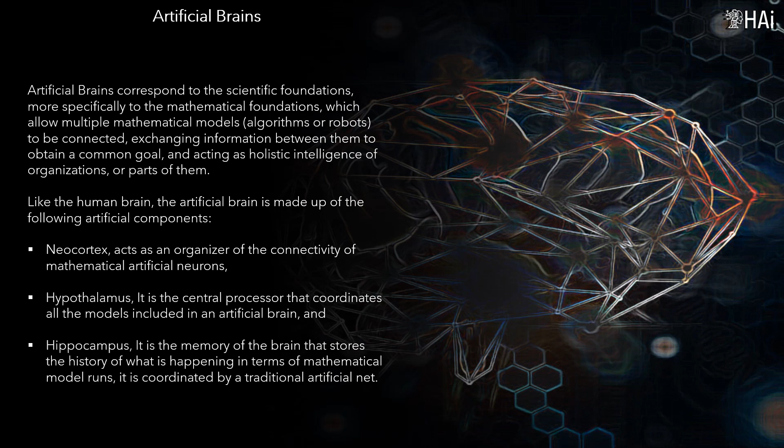Industrial enterprise-wide optimization. Industrial value chains can be conceived as multiple links that work as the union of two chains: supply and demand. The supply chain is associated with production activities, while the demand is associated with the business. These chains cannot be thought of as mutually exclusive, as the border that could divide them is fuzzy. What is clear is that they are complementary and that their union affects all the value chain.

HAi models mainly support two types of industrial planning activities. S&OP, sales and operations planning activities that are carried out periodically, usually every month or every week, to coordinate selling products with production activities.

IBP, integrated business planning, activities that are carried out periodically, usually every 6 months or every year, and aim to perform integrated value chain of the organization planning.

The solutions offered by HAi to the general industrial sector are based on the integration of the following groups of solutions: HAi DCO, Demand Chain Optimization; HAi SCO, Industrial Supply Chain Optimization; HAi Bio, Bio-Industrial Supply Chain Optimization; and HAi HRA, Human Resources Analytics.

In 2006, Jeremy Shapiro published the article 'Beyond Supply Chain Optimization to Enterprise Optimization,' in which he stated: 'The recognition that strategic supply chain planning should be integrated into larger business planning exercises will serve to break down barriers to fact-based decision-making,' starting from SCM, or supply chain management, focused on production, as a first step in standardized planning.

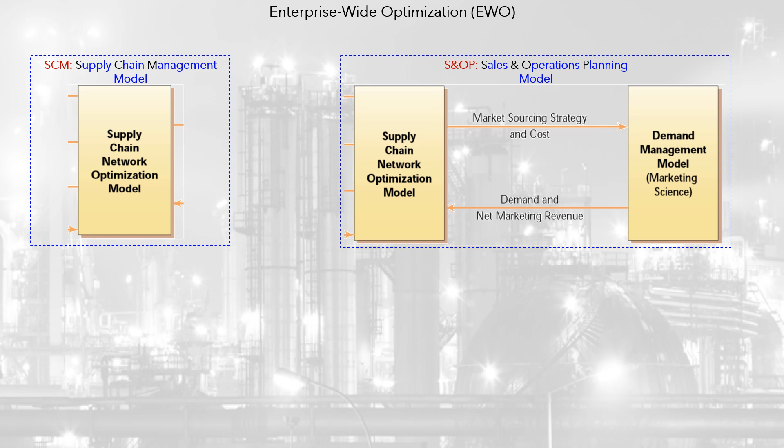Shapiro envisions what the S&OP, Sales and Operations Planning model, formally is, as the integration of sales and production planning. And finally, it establishes what is now IBP, Integrated Business Planning Model, which involves the financial planning as part of planning. The actual experience has not been as Shapiro envisioned it, but every time we are closer to it, with the incorporation of ALM models, assets and liabilities management, as part of supply chain planning.

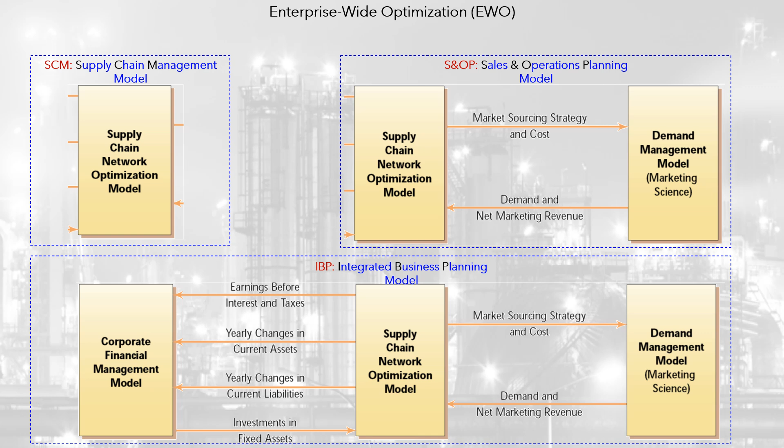In the paper, Enterprise Profit Optimization, EPO, The Next Wave in Value Creation, Robert Phillips from Manugistics said, "Integrating pricing actions and supply chain actions, EPO provides companies with the tools required to quickly and effectively achieve real optimization goals."

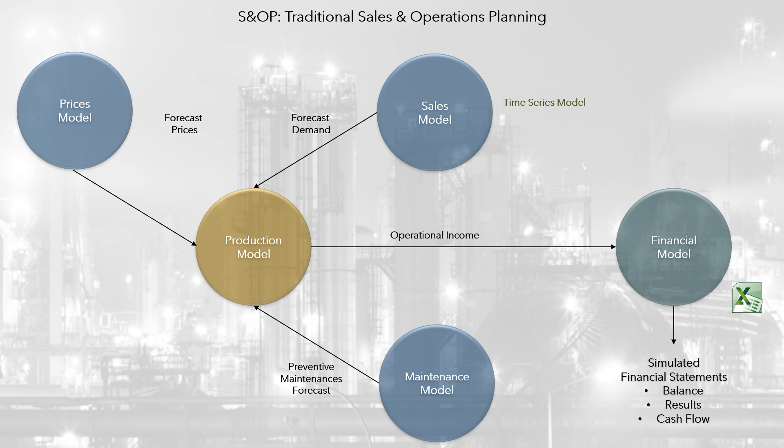Until the advent of Industry 4.0, S&OP modeling was concentrated on production modeling, considering as exogenous parameters the results of models for sales and maintenance. The financial results are obtained from post-processing, in some cases in Excel books.

In the era of Industry 4.0, S&OP may be constructed based on 8 groups of solutions or systems: production, energy, maintenance, distribution, sourcing, human resources, financial, and sales and marketing. HAi views the systems as groups of equations; which must be included in the S&OP mathematical problem depends on many factors, so there is no revealed truth regarding what the S&OP problem is. Since the equations are defined in a database, the configuration of a problem is limited to selecting from the equation store the ones that the modeler wants to consider in the model.

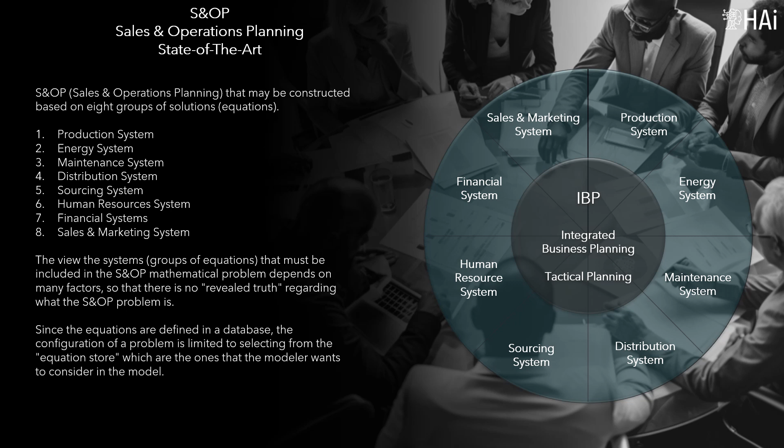Visually, it is easy to see the evolution of the traditional S&OP concept to a modern IBP that covers virtually all the operational functions of an industrial organization. This leads to 2 problems that must be solved from a computational point of view. If traditional approaches are used, a large number of programmers are required to generate all the necessary source code and to coordinate all the models, and large computational power is necessary to solve the integrated problem.

This evolution gives rise to enterprise-wide optimization. Enterprise-wide optimization, the comprehensive and complete view of the value chain, improves competitive advantage, reduces costs and increases profits. Therefore, managers seek to comprehensively optimize the planning and scheduling activities of their value chain, which was originally understood as the coordinated sum of supply chain management, SCM, and demand chain management. Today, EWO has expanded and covers all functional areas of the organization, including financial and human resources chains.

There are 4 dimensions to the optimal synchronization of a supply chain, namely: functional, associated with the purchase, manufacture, transport and storage of industrial inputs and products; spatial, associated with activities through industrial facilities and different forms of markets; hierarchical, associated with the impact of decisions, strategic, tactical and operational; and business. Enterprise integration makes SCM one of the components of a broader view of integrated planning. They respond to the purposes of strategic and tactical planning within the organization.

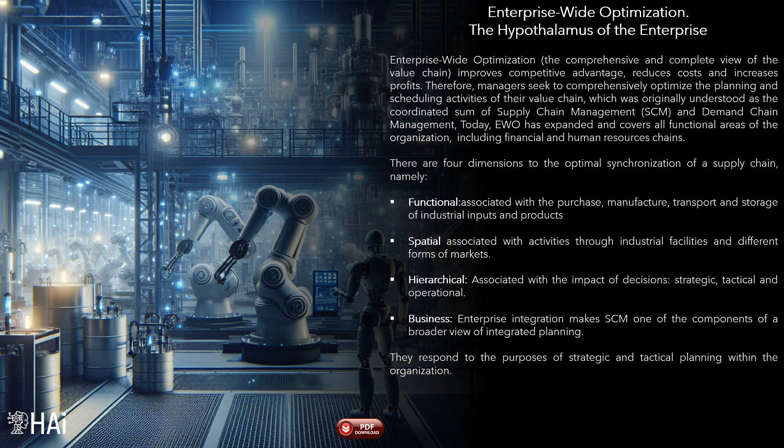Hierarchical coordination of planning tools. It is traditional to organize decisions hierarchically into strategic, tactical and operational. The operational decisions are divided into scheduling and advanced optimal control. However, due to the technological progress generated by Industry 4.0, mainly in relation to smart metering systems, nowadays we can talk about a new type of online optimization modeling: real-time distributed optimization. From the point of view of mathematical modeling, hierarchical levels are intertwined and coordinated through the boundary conditions in time, and common modeling that can be shared.

The modeling strategy of HAi is that all models of a decision support system can communicate with each other. Under the principle of transitivity of algebraic formulations, models grow in complexity as they descend the hierarchy of decisions. All models share equations, mainly those related to the physical process. Therefore, they can be made in a continuous modeling process.

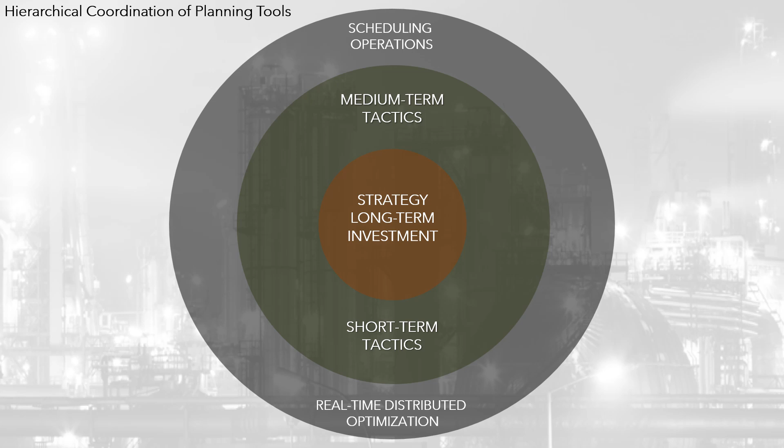The models of higher hierarchy will be more aggregated, in order to cover long periods of analysis, of the order of years. The emphasis of the model should include the interpretation of the economic and technological future, so it is appropriate that they are stochastic optimized. As the models approach real time, the level of detail increases and the planning period decreases, the most important being the engineering representation of the process.

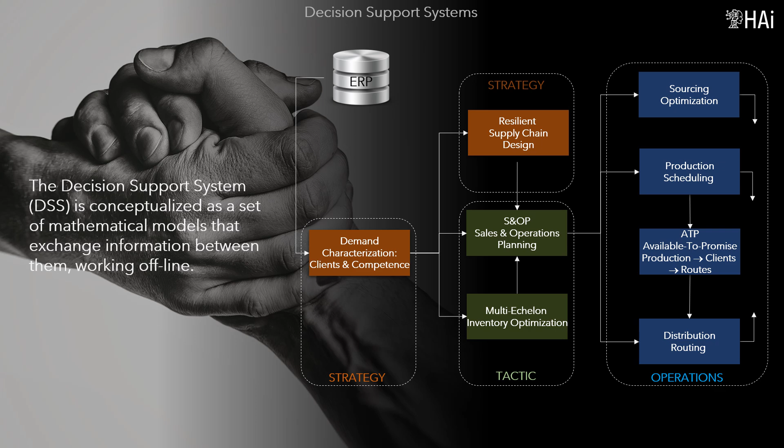Spatial coordination is related to activities through industrial facilities in various regions and different forms of markets. The decision support systems, DSS, were conceptualized as a set of mathematical models that exchange information between them, working offline. The artificial brain is the evolution of DSS under the Industry 4.0 revolution, conceptualized as a set of mathematical models that autonomously exchange information between them, working online, using distributed optimization.

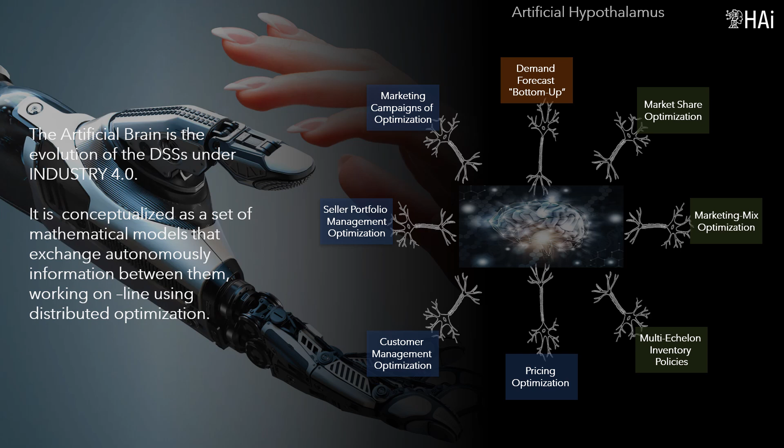HAi OIL EWO meets all the software solutions developed by HAi, in different areas of application of mathematical optimization models, oriented to planning and to scheduling operations, in different businesses of the petroleum products supply chain. To ensure optimal decision-making at the level of strategy and tactics, the system must be considered, synchronizing the different links in the chain, in space, function, and time.

The management of the complete oil supply chain must be based on the integrated optimization of the different links. It is one of the main research topics worldwide, due to the importance and impact of the products it handles. The support of this type of planning is complex, and therefore turns out to be a perfect field for the application of optimization tools, mathematical programming, in order to support decisions that allow the optimal coordination of the holistic supply chain.

Oil enterprise-wide optimization integrates mathematical models for each of the links in the oil supply chain, in such a way to manage the planning of the supply chain with a holistic vision. The design of HAi OIL EWO was the result of work done for a multi-business oil company. The union of models, and their coordination, forms the hypothalamus of an oil enterprise.

The current computational power allows to model in detail the supply chain, considering individually all the systems that compose it. This allows to visualize all the existing bottlenecks that affect the maximization of economic gains. When all the models that make up a company are solved using the concepts of real-time distributed optimization, an artificial hypothalamus is obtained. Structured mathematical modeling allows all models to merge around a core of equations that connect them all.

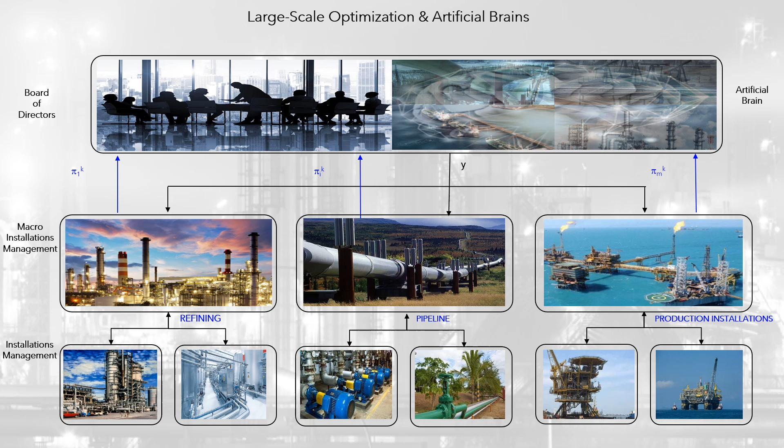Large-scale optimization and artificial brains. One of the fundamental ideas of the artificial brain is the atomization of the system, bottom-up approach, to integrate multiple mathematical models, using the framework of large-scale optimization methodologies, like multi-level Benders theory, and Lagrangian relaxation.

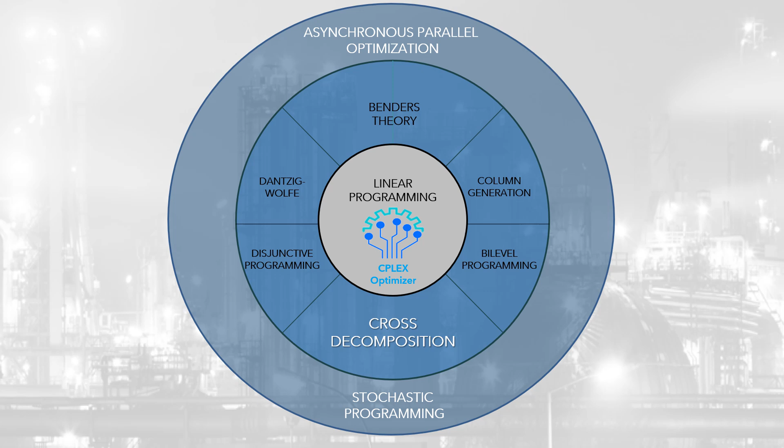Given the complexity of the real world, which involves mathematical models of all types, linear, nonlinear, discrete, continuous, convex, non-convex, etc., it cannot be thought that with a single methodology, all the problems that make up an artificial brain can be solved. Therefore, it is required to have access to multiple large-scale optimization methodologies, which, using the principles of cross-decomposition, connect all mathematical problems, to perform autonomous distributed optimization in real time. Large-scale optimization technologies rely on linear programming as the basic algorithm.

Oil and gas optimization solutions. Below are several optimization solutions, commonly applied in the oil industry. The oil industry includes global processes of exploration, extraction, refining, transportation and marketing of petroleum products. The largest volume products in the industry are fuels, natural gas, fuel oil, and gasoline. However, petroleum is the raw material for many chemicals, including pharmaceuticals, solvents, fertilizers, pesticides, and plastics.

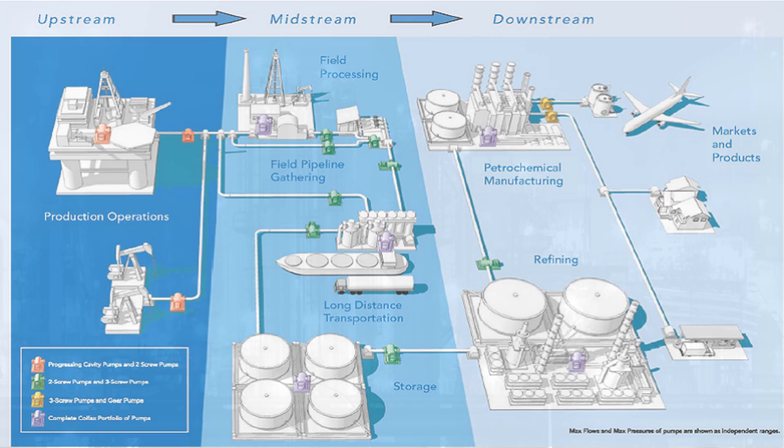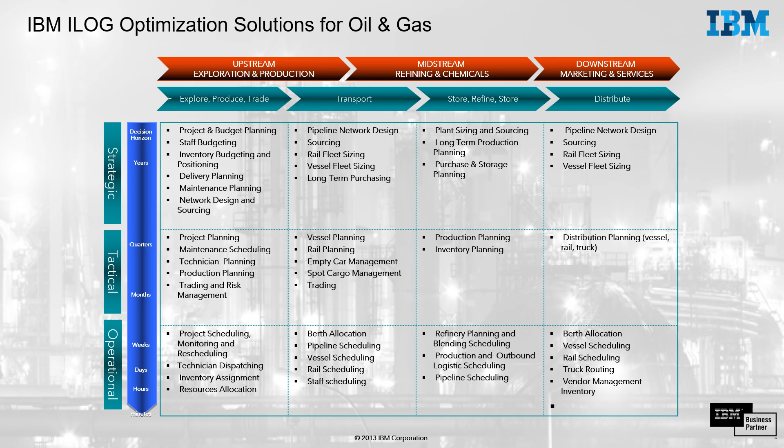Under the modern vision of enterprise-wide optimization, production planning models, of any hierarchy, must integrate multiple functions, or models, and not be limited to sales and production planning. In the case of planning a large refinery, the following group of models, or functions, should be considered. Oil refining. Energy and industrial services. Oil assets maintenance. Sales and distribution. Crude oil sourcing. Human resources, and financial.

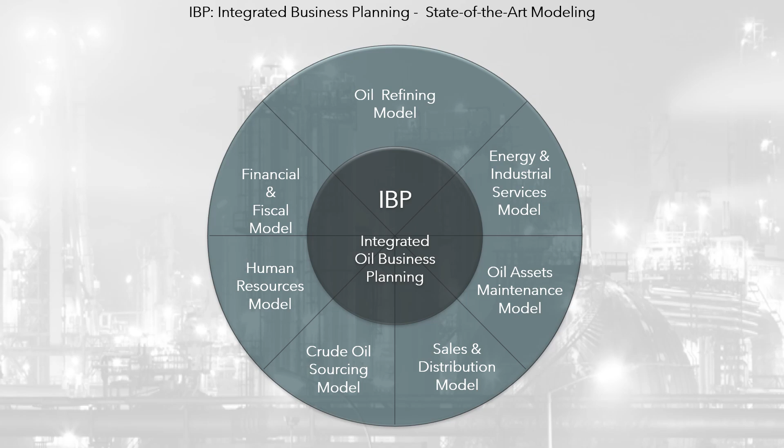Oil enterprise-wide optimization integrates mathematical models for each of the links in the oil supply chain, in such a way to manage the planning of the supply chain with a holistic vision. The design of HAi OIL EWO was the result of work done for a multi-business oil company. The union of models, and their coordination, forms the hypothalamus of an oil enterprise.

The current computational power allows to model in detail the supply chain, considering individually all the systems that compose it. This allows to visualize all the existing bottlenecks that affect the maximization of economic gains. When all the models that make up a company are solved using the concepts of real-time distributed optimization, an artificial hypothalamus is obtained. Oil refining optimization.

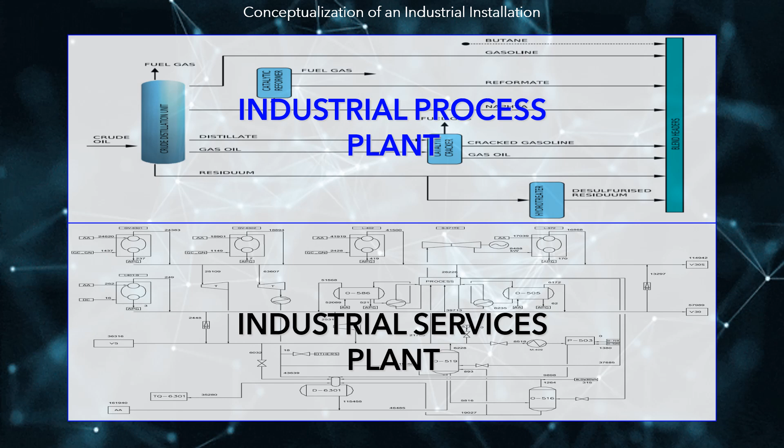Hypothalamus AI considers the production process as a union of two processes. Product transformation, conversion of crude oil into commercial products, through processing units, and energy transformation, processing of auxiliary industrial services required by process units, and which are consumers, or energy producers, in the service units.

To optimize energy efficiency, the first step is to optimize the integrated supply chain, since this is the part of the production process that consumes more economic resources.

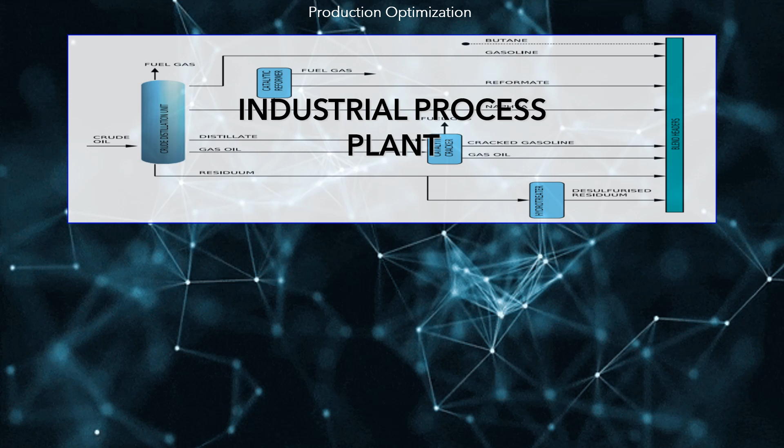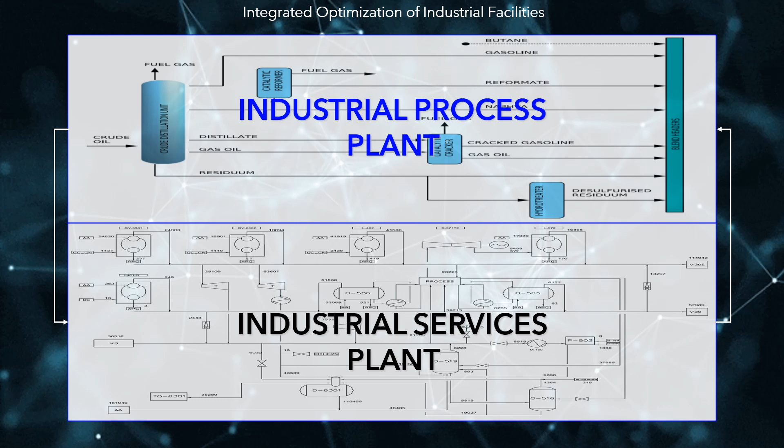Hypothalamus AI considers the production process as a union of two processes. Product transformation, conversion of crude oil into commercial products, through processing units, and energy transformation, processing of auxiliary industrial services required by process units, and which are consumers, or energy producers, in the service units.

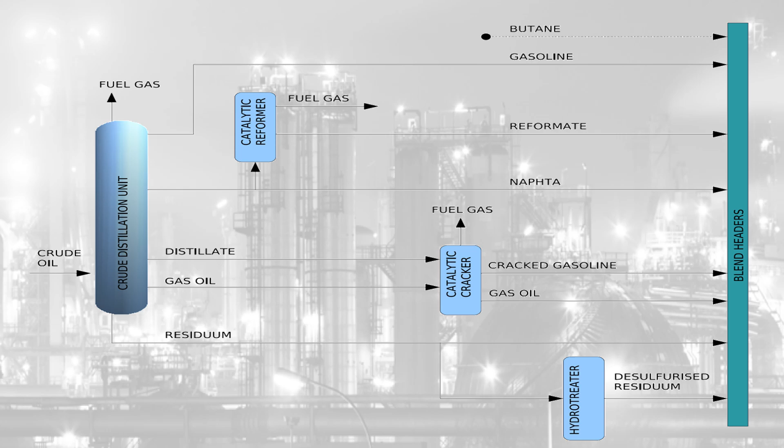The image presents an example of a refinery, which is composed of 5 facilities, or process units. A simplified flowsheet of a crude oil refinery is shown in the graph. The process is divided into 3 stages: crude oil management, crude to fuel transformation, and blending operations.

The video oil refining optimization, advanced analytics solutions presents HAI's vision of this problem, and should be considered as a reference for our proposal. Linear optimization model for sales and operations planning, S&OP.

HAI-OIL-REF includes a generic model that can serve interchangeably to plan, at the aggregate level, the 2 crude and/or biomass refining processes. The level of aggregation is fundamentally related to the non-linearities associated with this type of process, but not with the level of detail with which it is possible to represent the production processes, which can be spatially detailed in all units used in the production of refined products.

HAI-OIL-REF considers the refining process as a union of 2 processes. Product transformation, conversion of crude oil and biomass into refined products, through process units, and energy transformation, processing of auxiliary industrial services required by process units, and which are consumers and/or energy producers, in so-called service units.

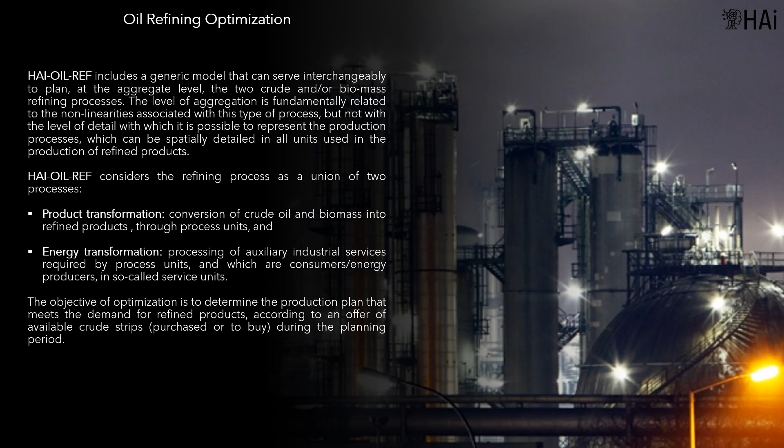The objective of optimization is to determine the production plan that meets the demand for refined products, according to an offer of available crude strips, purchased or to buy, during the planning period. From the point of view of mathematical modeling, HAI-OIL-REF considers two types of process units.

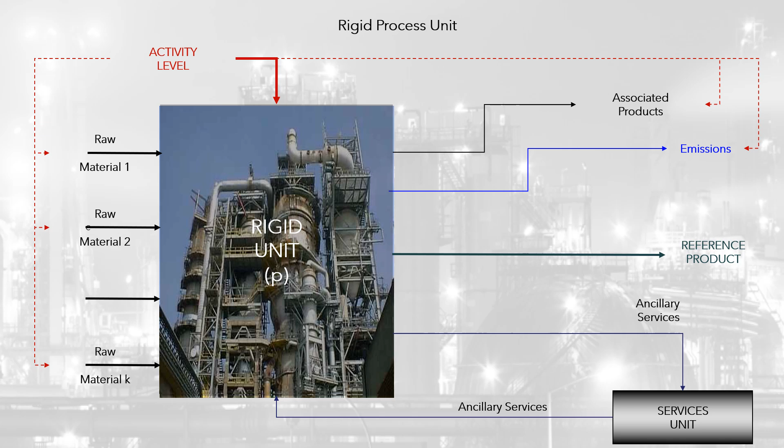Rigid unit considers a unit as a process that is defined based on certain input, raw material, refined final or intermediate products, and that produces refined products in fixed proportions, and flexible unit considers multiple possibilities for production processes in which the proportions of the blending of the products consumed, and the quantities produced, are determined by the model.

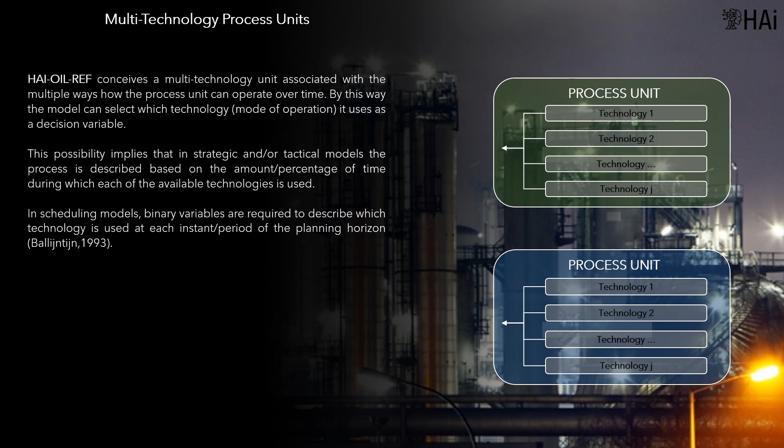For flexible units, quality specifications must be introduced as part of the model constraints, so that the volume and/or weight product generated by the model meets these specifications. HAI-OIL-REF includes a multi-technology unit, associated with the multiple ways how the process unit can operate over time. By this way, the model can select which technology, mode of operation, it uses as a decision variable.

This possibility implies that in strategic and/or tactical models the process is described based on the amount, or percentage, of time during which each of the available technologies is used. In scheduling models, binary variables are required to describe which technology is used at each instant, or period of the planning horizon.

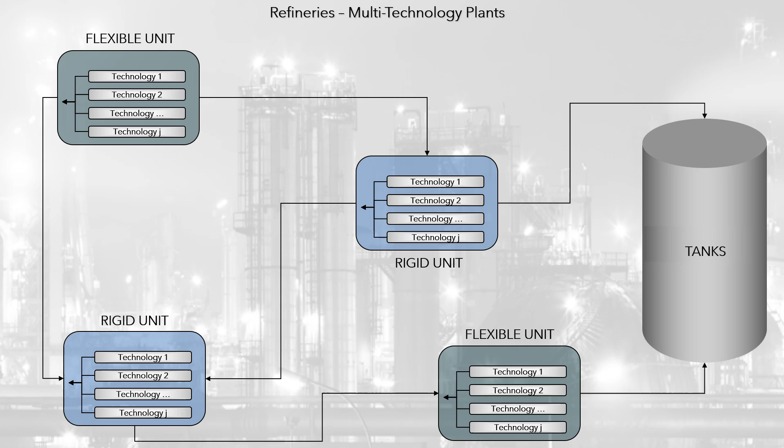The modeling of the connectivity between production units can be done in an aggregated way, through tanks, or in detail through collectors. This representation is appropriate when it wants to visualize bottlenecks in the flow of products, and when it wants to link the auxiliary service plant with the process plant.

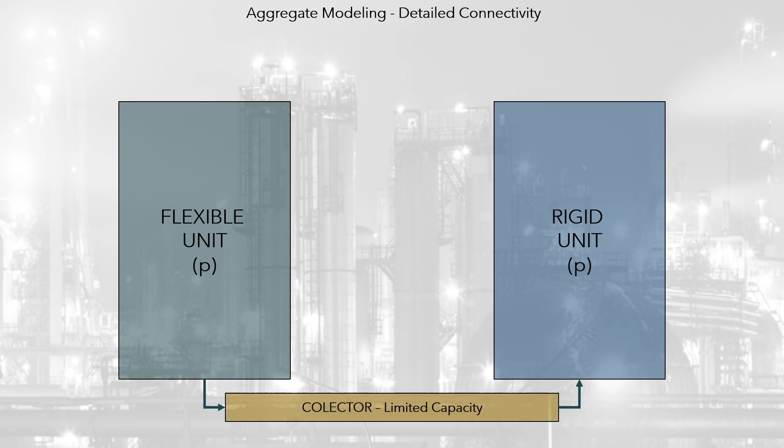Modeling a refinery based on a single type of unit has its drawbacks. A fixed refinery always produces excessive amounts of some finished products, a flexible one generally has too much flexibility compared to a real refinery. That is why the best strategy to model refineries is based on a combination between rigid and flexible units considering costs, demand, capacity, production, profit, and possible expansion of the refinery.

However, the units, rigid or flexible, can operate continuously, or in batches. In addition, the flexibility of the unit extends, not only to the different refined products but also to the different raw materials, to the sources of the raw materials or even to any possible combination of them.

In this way, the refinery processes can be optimized through a model with a unified mathematical representation, where all types of units, processes, and forms of operation are incorporated. As a byproduct of processes are considered the pollutants of the environment, on which restrictions may be imposed.

Multi-period refinery planning mixed nonlinear model. This section is supported in the paper. Refinery production planning, multi-period MINLP with nonlinear CDU model.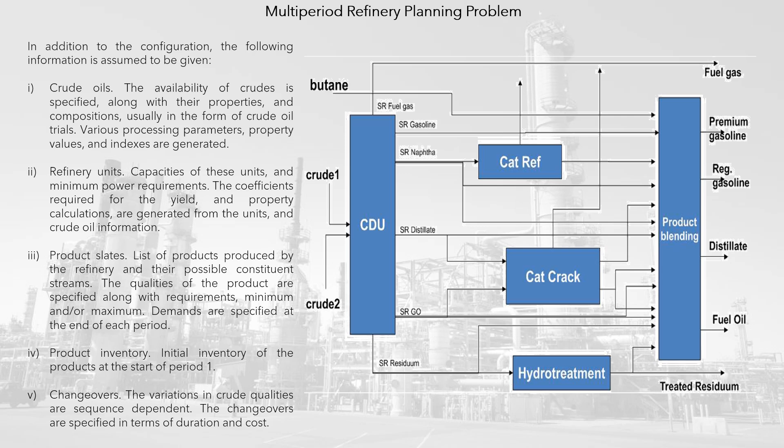Product inventory. Initial inventory of the products at the start of period 1. Changeovers. The variations in crude qualities are sequence dependent. The changeovers are specified in terms of duration and cost.

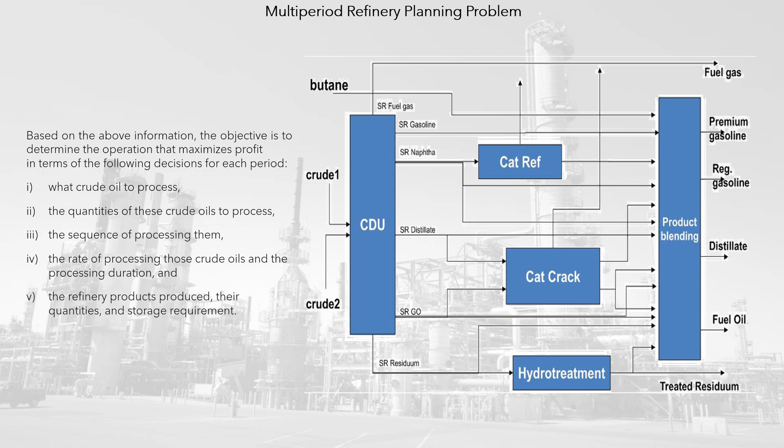Based on the above information, the objective is to determine the operation that maximizes profit in terms of the following decisions for each period: what crude oil to process, the quantities of these crude oils to process, the sequence of processing them, the rate of processing those crude oils and the processing duration, and the refinery products produced, their quantities, and storage requirement. The mathematical formulation for the multi-period refinery planning model builds on the previous work of Alattas, Grossmann, and Palou-Rivera, 2011, and Erdirik-Dogan and Grossmann, 2008.

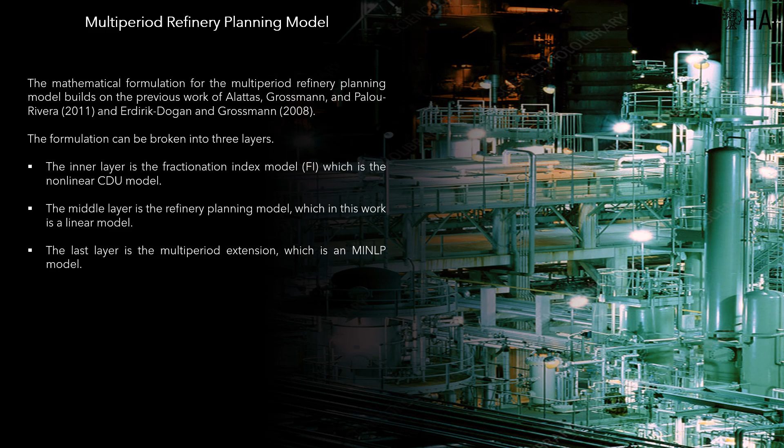The formulation can be broken into 3 layers. The inner layer is the fractionation index model, FI, which is the nonlinear CDU model. The middle layer is the refinery planning model, which in this work is a linear model. The last layer is the multi-period extension, which is a MINLP model.

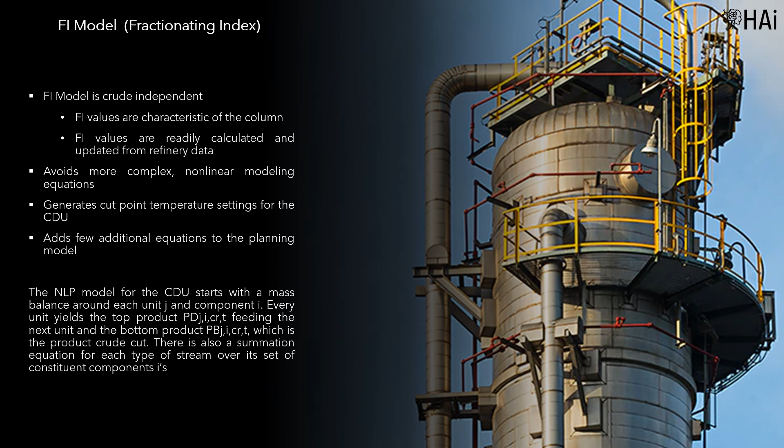The appeal of the FI model is that it is crude independent. FI values are characteristics of CDUs; they are readily calculated and updated based on refinery data. It is based on a simple nonlinear modeling approach, avoiding more complex ones, calculates cut point temperatures that help in other calculations and models, and has relatively few equations to add to the planning model.

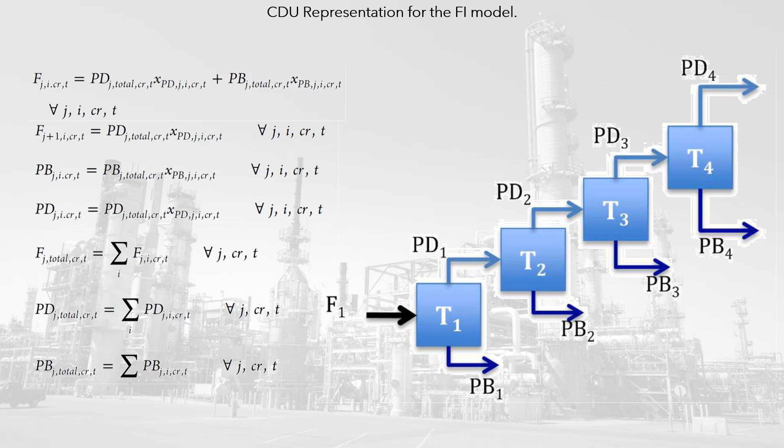The NLP model for the CDU starts with a mass balance around each unit J and component I. Every unit yields the top product PD feeding the next unit, and the bottom product PB, which is the product crude cut. There is also a summation equation for each type of stream, over its set of constituent I components. Ti is the output boiling point temperature of component I. The image presents the equations that must be met.

The splits of the distributed components are calculated using the FI parameters. For each unit, there are 2 FI values, one for the rectifying section and another for the stripping section. Choice of the correct value is based on the calculated temperature and the component. The rectifying FI, FIr, is used if the temperature is greater than the component boiling temperature, otherwise, the stripping FI,

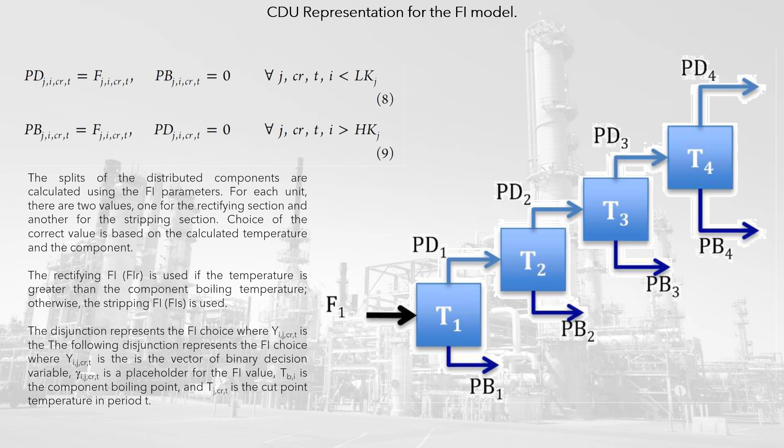FIs, is used. The disjunction represents the FI choice where y is the vector of binary decision variables, gamma is a placeholder for the FI value, TB_I is the component boiling point, and T_J,CR,T is the cut point temperature in period T. The component distribution at each unit J is based on the light key LK_J and heavy key HK_J components for each unit based on the initial and end boiling points relative to each cut. The components lighter than the light key are only obtained in the top product stream, while the ones heavier than the heavy key are only obtained in the bottom product stream.

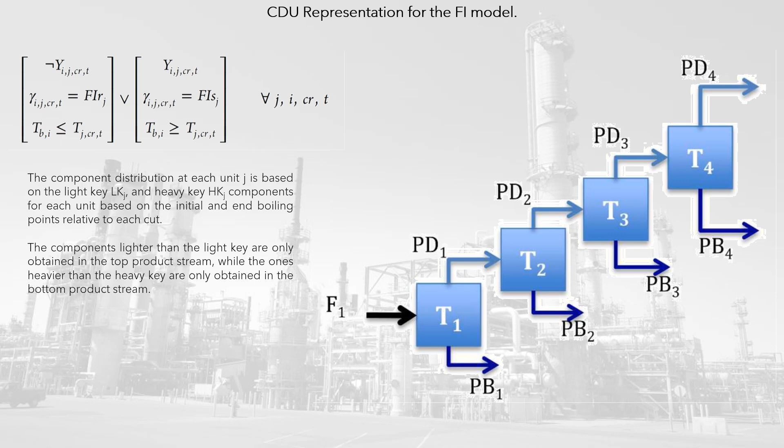The next model is the refinery planning model. This includes the set of equations for calculating the product yields from each process unit, except the CDU, as well as stream properties calculations and product blending. Typically, the planning model will include checking the feedstock availability, meeting the product demands and the objective function. However, these constraints and equations are moved to the next layer of the model as part of the extension from single period to multi-period horizon.

The throughput of process unit K is calculated using a coefficient multiplied by the feed unit, to obtain the output unit product flow. The capacity requirement of unit K is ensured by using the appropriate constraints. The interconnections between the process units are managed using several splitters and mixers. The crude processing rate is linked to the CDU model.

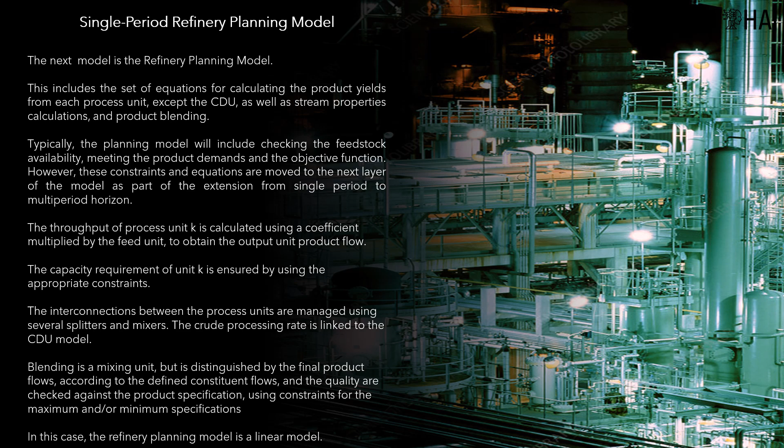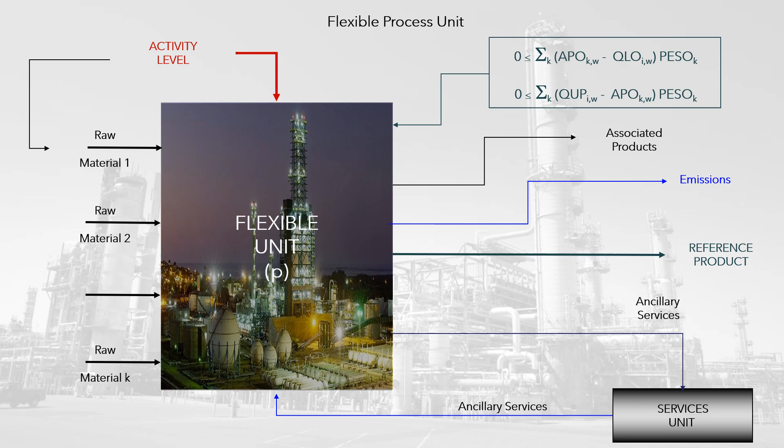Blending is a mixing unit, but is distinguished by the final product flows, according to the defined constituent flows, and the quality are checked against the product specification, using constraints for the maximum and/or minimum specifications. In this case, the refinery planning model is a linear model. The multi-period layer is based on the approach proposed by Erdirik-Dogan and Grossmann, 2008.

The idea is to determine the length of the processing times for each crude oil, and to use traveling salesman constraints, to determine the sequence for processing crude in each period, and identifying the link to break, and connect the sequence to the adjacent periods. The objective is maximizing profit.

When there are no sub-cycles in any period, the changeovers are properly accounted for in each period, and any possible crossovers. Otherwise, subtour elimination constraints are added until all sub-cycles are eliminated. Also, since the duration of the changeovers is relatively modest, the model assumes for simplicity that changeovers cannot cross periods. The extension to this case can be easily implemented.

The development of these planning models is broken into two categories. LP models, namely fixed yield and swing cuts, like PIMS, and NLP models, including the aggregate model and fractionation index model. In this case the model is MILP.

Case: Crude oil scheduling and refinery planning. This case is based on the document Crude oil scheduling and refinery planning by Lagrangian relaxation. Both crude oil scheduling and refinery planning are formulated as optimization problems, and are integrated into a single full-space MILP. The integrated formulation is constructed based on the overlap between the CDU charging operations at the scheduling level, and the CDU feeding decisions at the planning level.

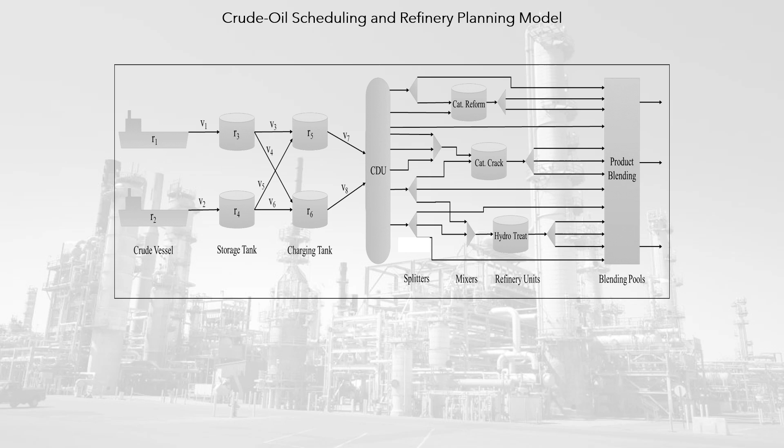The mathematical formulation for the full space problem is developed in three stages. Multi-period discrete time formulation for refinery planning, RP, maximizing the total NPV. Priority slot-based continuous time formulation for crude oil scheduling, CS, with multi-period extension, minimizing the total crude purchasing cost, and

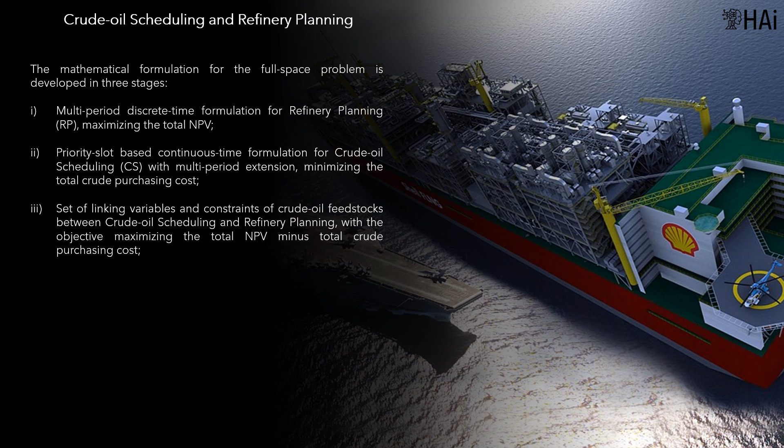set of linking variables and constraints of crude oil feedstocks between crude oil scheduling and refinery planning, with the objective maximizing the total NPV minus total crude purchasing cost. The video case, Crude Oil Scheduling and Refinery Planning, presents more details of this problem.

Industrial Services Optimization. ISO corresponds to one of the models oriented to the optimization of energy consumption in industrial plants that include large-scale industrial service plants, such as refineries, petrochemicals, etc. These services often include self-generation, cogeneration, and the exchange of energy with the interconnected electricity system. The objective of the model is to minimize the consumption, or cost, of the energy required by the industrial processes, supported by the industrial services plants.

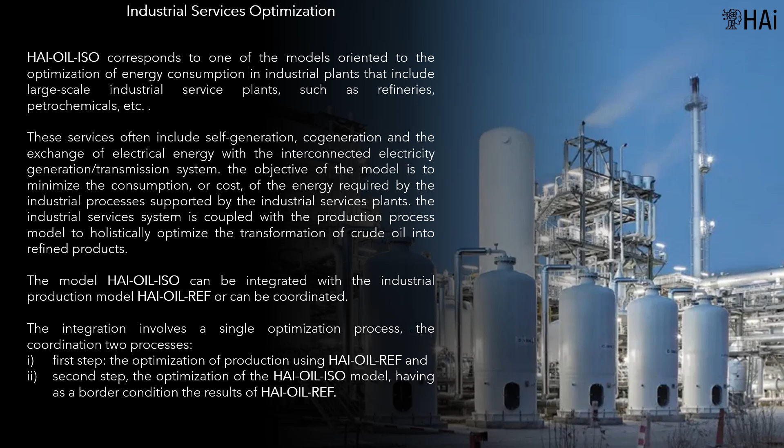The industrial services system is coupled with the production process model to holistically optimize the transformation of crude oil into refined products. This section focuses on industrial services plant optimization. Service plant: place where various industrial operations, related to the auxiliary services demanded by process plants, are developed.

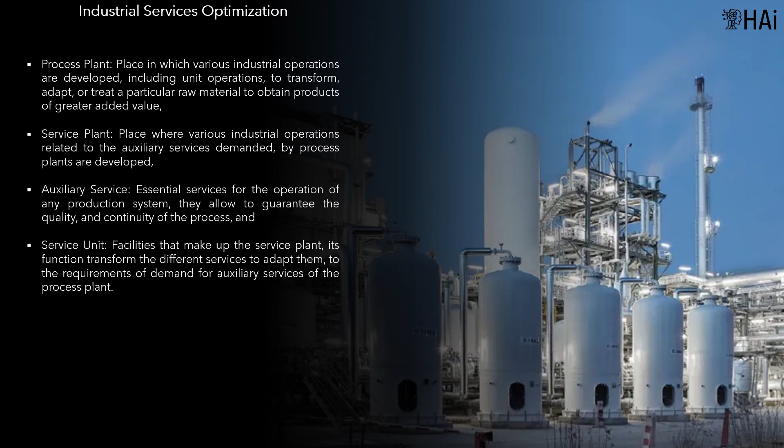Auxiliary service: essential services for the operation of any production system; they allow to guarantee the quality and the continuity of the process. And service unit: facilities that make up the service plant; its function is to transform the different services to adapt them to the requirements of demand for auxiliary services of the process plant.

Demand fluctuations are typical of utility or thermoelectric plants in petroleum refineries. Among the major causes are changes in the oil feed properties, multiple operational campaigns, maintenance of process units, interruption of electric energy supply, and cost variations of fuels and electric energy.

On the other hand, utility systems are essential for the operational feasibility of refineries. They must continually adapt their production levels to satisfy dynamic demand patterns. Therefore, the designs of utility plants tend to present a high level of flexibility, allowing multiple operational configurations that satisfy the same demand targets, sometimes with significantly different operating costs.

The processes that govern energy exchange and fluid dynamics are nonlinear. The optimal point of operation of the units of the service system varies depending on the flow, temperature, and pressure handled by the unit. Efficiency is a nonlinear indicator of great importance, relating the amount produced to the amount of raw material used. For the management of this indicator, it is necessary to have an adequate data acquisition system, which ensures correct measurement of the parameters that facilitate its use.

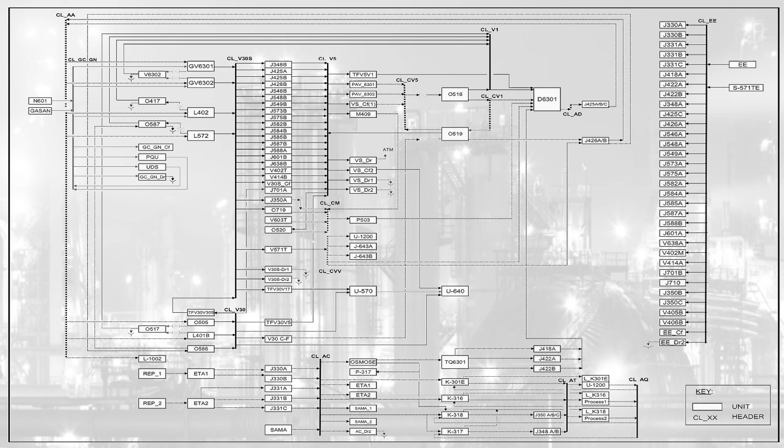In service plants, we find different types of units that interact and interconnect with other units to transform one service into another. Different types of service units are used to describe the process, and although the diversity of units and functionality is clear, within the modeling they will be considered as a single entity, characterized by the value of the parameters that define it. These parameters refer to input, product, and driver.

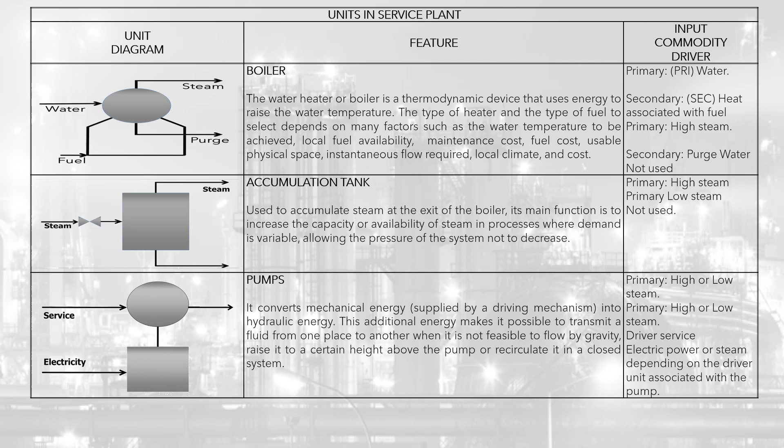The table presents the main units that make up the service plant and their basic functions. Units such as pumps, boilers, accumulation tanks and valves, condensers, manifolds, and steam turbines are specified.

There are other fundamental elements for the proper functioning of the service plant, such as measuring units to control the operating conditions of the units, like pressure gauges, thermometers, water level indicators, flow meters for steam, alarm and control devices, among others. These elements are not handled as entities within the mathematical model that represents the service plant, but they are of great importance, since they make up the data acquisition system, fundamental to the state estimation modeling process.

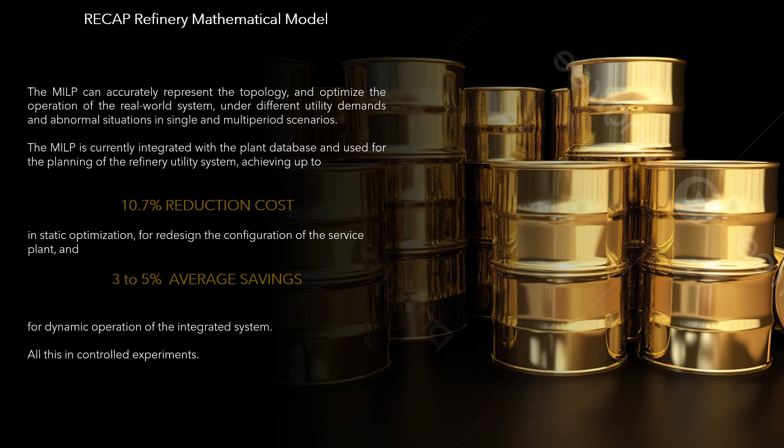The Petrobras mathematical model can accurately represent the topology and optimize the operation of the real-world system under different utility demands and abnormal situations in single and multi-period scenarios. The model is currently integrated with the Petrobras plant database and used for planning the recap refinery utility system, achieving up to 10.7% reduction in cost for static optimization to redesign the configuration of the service plant, and 3 to 5% average savings for dynamic operation of the integrated systems. All this in controlled experiments.

The central process of tactical optimization of production and energy management is related to the integration of the two systems through integrated mathematical modeling.

Artificial intelligence transforms business sustainability. The use of decision-making artificial intelligence, DMAI, is becoming more common to help companies achieve their carbon emission reduction goals and become more aware of the impact their business operations have on the environment. According to a study conducted jointly by Microsoft and PwC, the use of artificial intelligence can help companies provide valuable information and make more informed decisions, leading to better results in their sustainable practices and economic results. The research reveals that DMAI can improve energy efficiency by analyzing data from sensors and other sources to identify areas where energy consumption can be reduced, optimizing their operations mathematically, and reducing polluting waste.

DMAI is an essential factor for sustainability. It's the key to unlocking knowledge, driving industrial efficiency, and enabling the transformative change we need to address global environmental challenges.

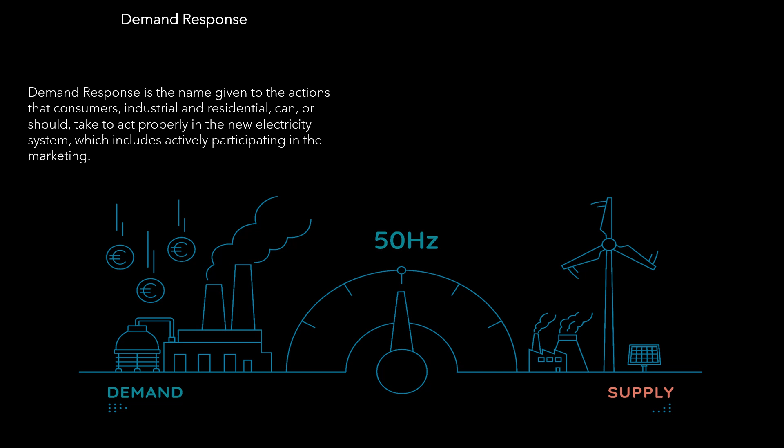Demand response is the name given to the actions that consumers, industrial and residential, can or should take to act properly in the new electricity system, including actively participating in the market. To act as an effective agent, industries must know the structure of the electricity system and market.

In this structure, two types of agents are displayed: the independent system operator, ISO, and consumers. The ISO operates the grid, dispatching centralized electrical resources, and manages markets, creating incentives for demand management. Consumers receive price signals from the market, buy and/or sell electricity to the market, and consume electricity from the national grid, and/or produce electricity with their smart grid.

To participate in demand response, the type of company must be matched with the opportunities provided to companies. In 2007, the North American Electric Reliability Corporation, NERC, published a study analyzing different types of industries and relating them to the type of services they must offer, considering their industrial processes. However, at that time there was no possibility of considering energy storage, which allows smart grids to participate in dispatchable demand.

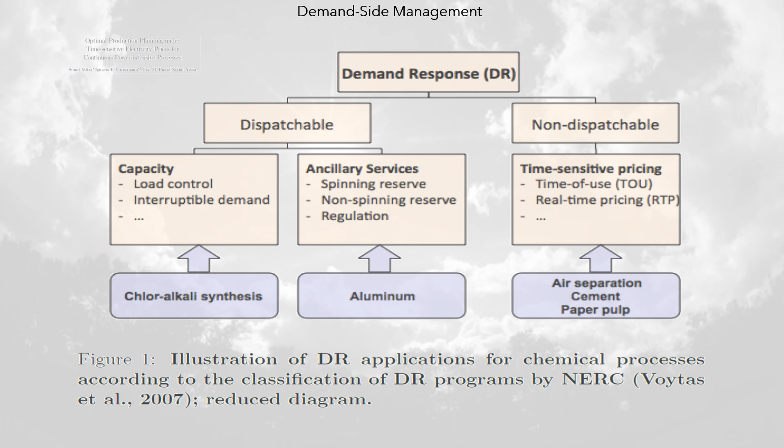It should be noted that in industrial environments, the possibilities of energy storage can be very different from traditional ones, since there are industrial processes that can store energy as part of the process.

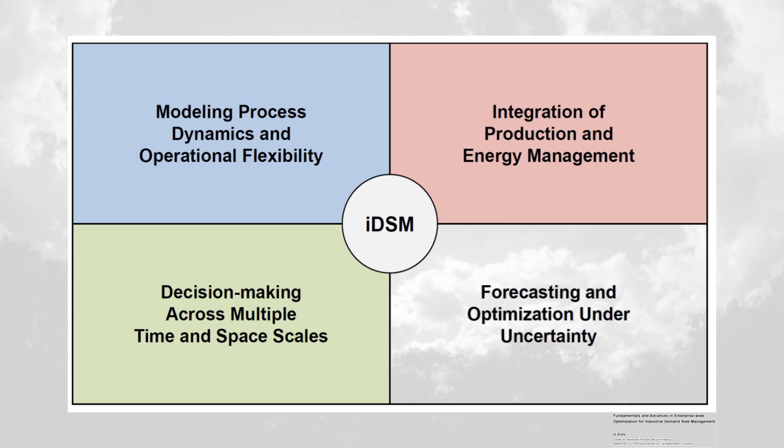Demand response and energy efficiency is a major issue for heavy industry, as it is an opportunity to significantly increase its profits and decrease the carbon footprint of its industrial processes, turning the maintenance of eco-sustainability into good business. To achieve optimal planning and scheduling of energy management, four major challenges must be faced: accurate modeling of process dynamics and operational flexibility, integration of production management and energy management, optimization at multiple space-time scales, and optimizing decision-making under conditions of uncertainty. These aspects will be discussed later.

The model determines the operational configuration of the plant by minimizing utility costs, and identifies steam losses as well as inefficient units by comparing the optimal solutions with the current operation. The MILP can accurately represent the topology and optimize the operation of the real-world system, under different utility demands and abnormal situations in single and multi-period scenarios.

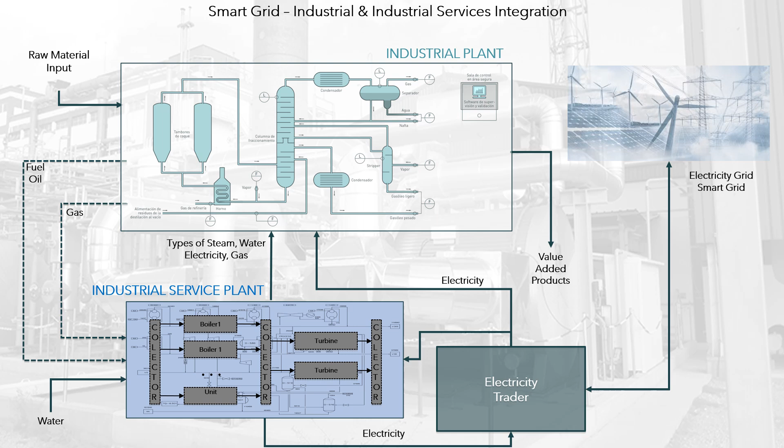Those interested in learning more about this topic can watch the video: Energy efficiency, innovation and digital transformation in the heavy industrial sector. An approach based on scientific praxis.

Water consumption minimization in industrial complexes.

Multi-period refinery planning mixed nonlinear model. Saving and using water in industrial complexes.

We can save water in industries by raising awareness among employees, measuring water consumption, optimal water use, waste recycling, installing water-saving equipment, routine pipe checks, etc.

Only 3% of the water on Earth is pure and can be used for daily routine. In 1999, between 5 and 10% was consumed for industrial purposes. As the world's population grows, water consumption will also grow. By 2030 it can reach up to 20%, so it is necessary to raise awareness about ways to save water in industries by reducing their consumption.

In addition, it will help the company reduce its water bills. Normally, in standard industry, water is used for the cooling of plants and equipment, the cleaning and preparation of products, cooling, and the application of paint and stains to the product.

But there are industrial processes intensive in the use of water, such as the production of shale gas.

Wastewater treatment plants: the major aim of wastewater treatment is to remove as much of the suspended solids as possible, before the remaining water, called effluent, is discharged back to the environment. As solid material decays, it uses up oxygen, which is needed by the plants and animals living in the water.

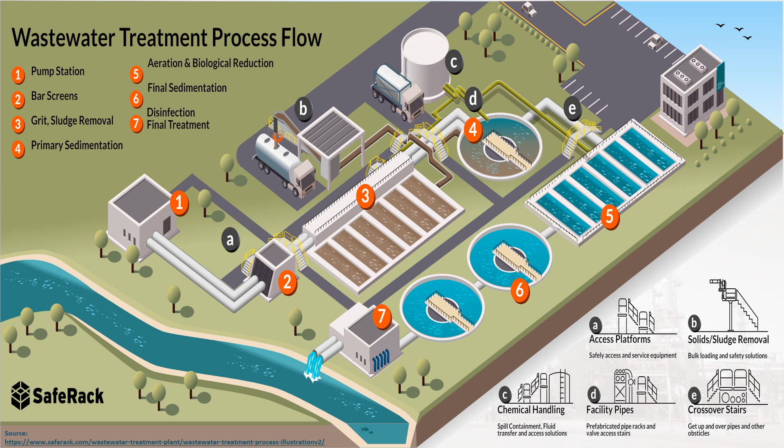Primary treatment removes about 60% of suspended solids from wastewater. This treatment also involves aerating, stirring up, the wastewater, to put oxygen back in. Secondary treatment removes more than 90% of suspended solids.

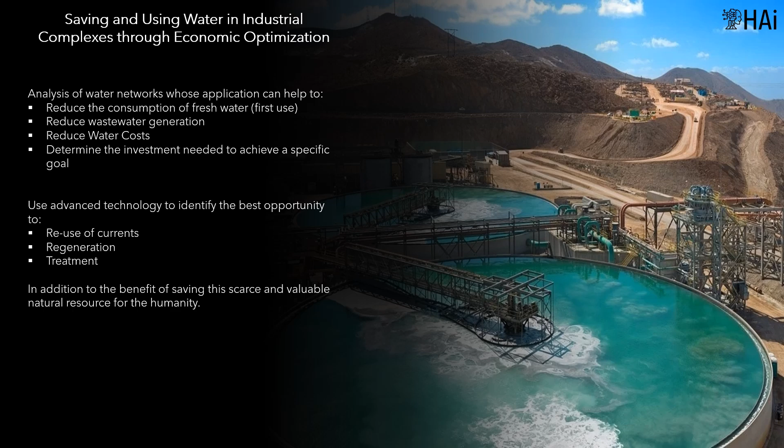Use of advanced decision-making, artificial intelligence, to identify the best opportunity to reuse currents, regeneration, and treatment, in addition to the benefit of saving this scarce and valuable natural resource for humanity.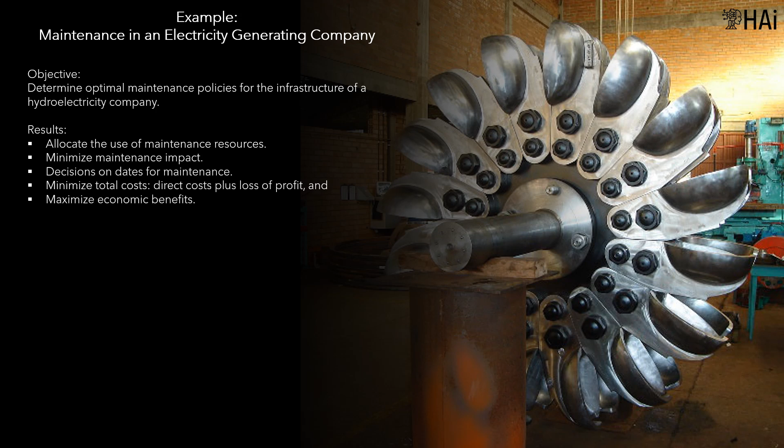Large industrial plants often have electricity generators the size of a commercial plant. Equipment maintenance optimization: below are three groups of mathematical models that are required to optimize the maintenance of industrial assets.

Maintenance of machines, equipment, or vehicles is associated with the maintenance of multiple assets that operate simultaneously in an industrial environment, which require maintenance activities as their productive life is consumed between maintenance events. These maintenances are scheduled at the team level, each of them independently.

Inventory management of spare parts: normally, to ensure the timely maintenance of spare parts, it is necessary to maintain inventories of parts and spare components, which are associated with working capital that generates high financial costs.

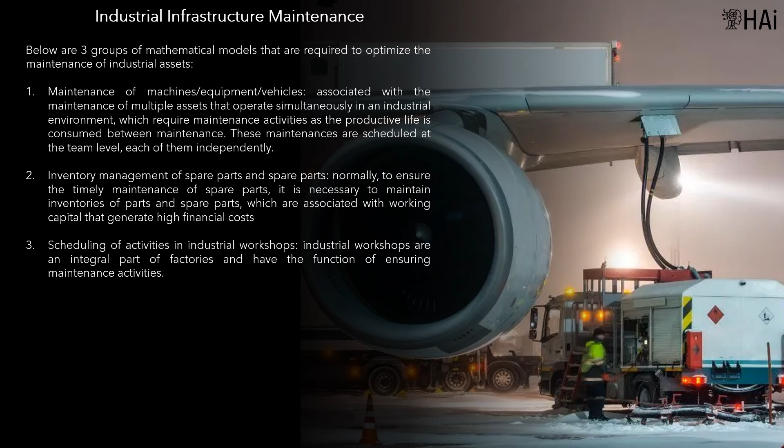Scheduling of activities in industrial workshops. Industrial workshops are an integral part of factories and have the function of ensuring maintenance activities.

Equipment maintenance model. Objective: determine the optimal policies for the operation of the assets, taking as a reference that they are composed of multi-level fault structures, each with its own probabilistic characteristics of failures of its components. Decisions: determine the optimal consumption of the asset before its next maintenance, and determine the maintenance actions that need to be carried out once the decision has been made to stop the asset to maintain it.

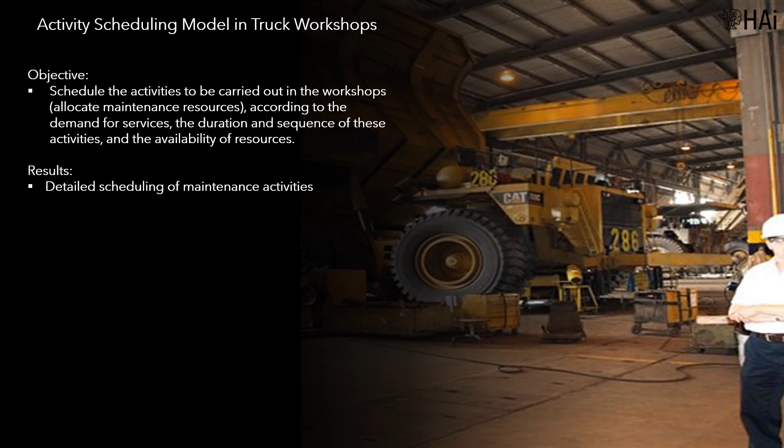Programming activities in workshops. Activity scheduling model in truck workshops. Objective: schedule the activities to be carried out in the workshops, allocate maintenance resources according to the demand for services, the duration and sequence of these activities, and the availability of resources. Results: detailed scheduling of maintenance activities.

S&OP and ALM: integration of production, finance, and taxation models. Enterprise risk management, ERM. The idea behind ERM is that an organization, while it can't eliminate risks, it can manage the risk.

ERM is a scientific approach to shaping risk, which is based on operations research methods such as applied probability and statistics, stochastic simulation, and investment portfolio optimization. ERM is a rigorous approach to quantifying and managing risks, from all sources, that threaten the achievement of an organization's strategic objectives. In addition, ERM identifies those risks that correspond to opportunities, which allow competitive advantages to be exploited. Its goal is to increase the wealth of owners.

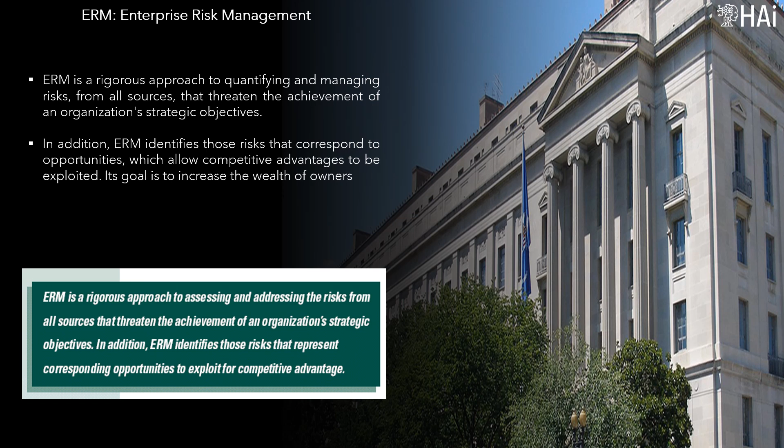Stavros Zenios, former director of the Hermes Center of Excellence on Computational Finance and Economics, University of Cyprus, defines ERM as the strategy that aligns the firm's businesses with the risk factors of its environment in the pursuit of strategic objectives. ERM is based on conceptual structure, organizational approaches, and analytical tools that integrate market, credit, liquidity, operational, and business risks to achieve the organization's objectives.

Assets and Liabilities Management, ALM. ALM allows you to align the risks of the environment, which are reflected in the balance sheet and in the profit and loss account, on both the asset and liability sides. ALM correlates all of an organization's risks, so that the calculation of the total risk exposure faced by the organization is not reduced or increased, as occurs when risk correlation structures are ignored.

ALM is defined as the management of assets and liabilities, supported by stochastic optimization techniques, to obtain an adequate economic return while protecting the company from extreme risks. This is achieved through the structuring of synthetic generation processes of probabilistic scenarios, which are considered in the algorithmic procedures typical of multi-stage stochastic optimization.

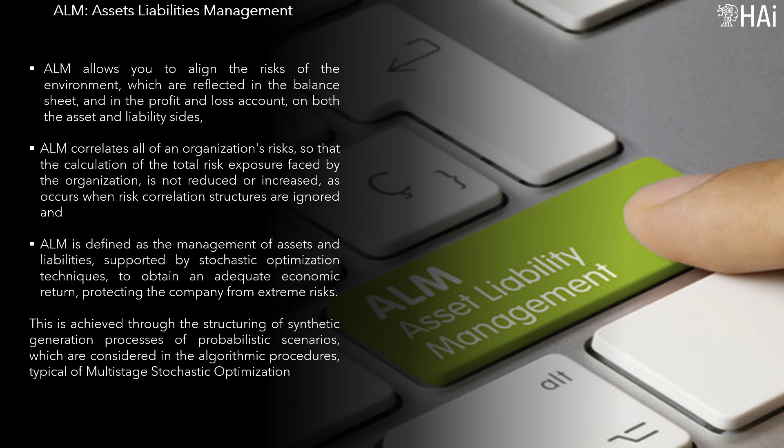Optimization modeling, production, finance, and taxation. The integration of mathematical programming models, better known as optimization, is since mathematical programming is a standard for the modeling of physical systems and business processes.

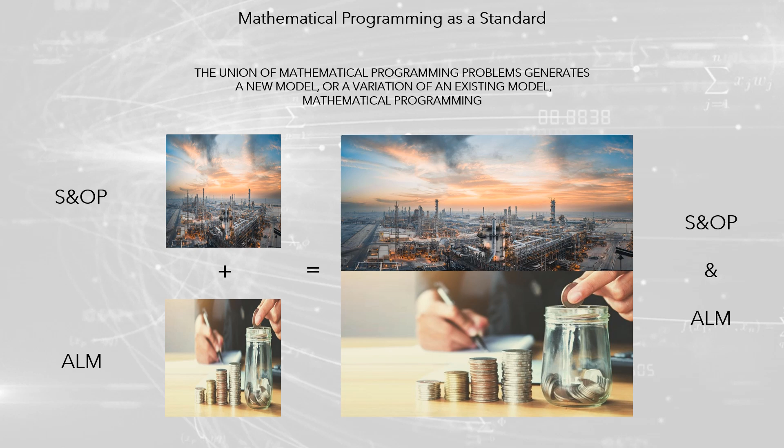This is because joining mathematical programming models, algebraic models, generates a new model, or a variation of an existing model, of mathematical programming. In the case of integration of production and finance, there are originally two models, S&OP and ALM. These models can be summed, resulting in a mathematical model containing the constraints of the two models, forming the S&OP ALM model. The user will have three models, the original ones and the integrated model.

The integration process can be conceived as the S&OP model that generates results, production and sales, which must be transformed into financial results in the ALM model, in such a way that the financial statements of the organization are produced, the control of which is the true objective of a private company. The traditional thing is to coordinate the two models, in such a way that the productive model feeds the financial model. This process has no feedback, and therefore the financial model can be a workbook in Excel.

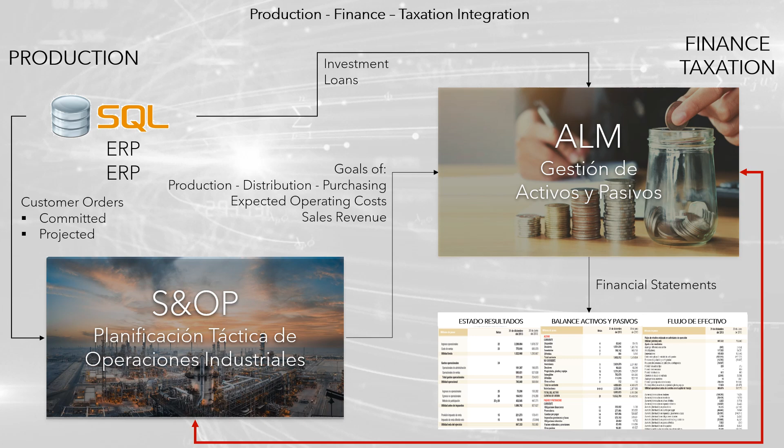The modern vision is to integrate the two models into a single model, which has significant advantages. It's a feedback model between the two systems. The field of control is expanded, as it is possible to introduce financial constraints into the production model, for example, cash flow constraints. Financial variables can be entered as part of the target function, e.g., the value of the firm at the end of the planning horizon, and achieve optimal solutions, which are not obtained with the coordination of models.

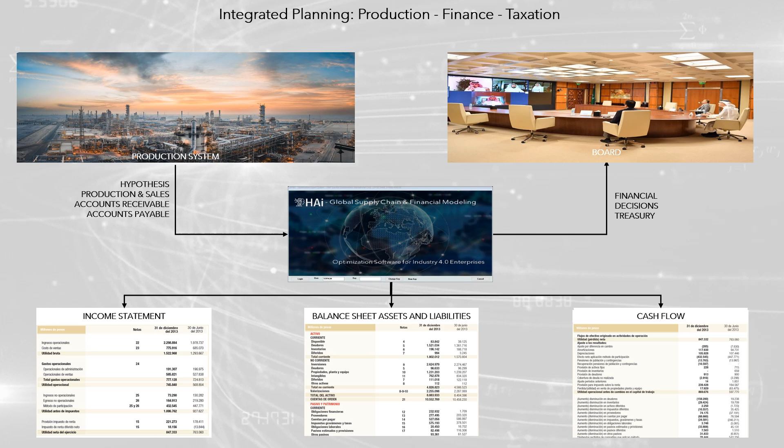From a functional point of view, the integration of the models implies the direct involvement of the board of directors in the planning of the company. As a substantial improvement of the decision-making process, linking the financial model with the supply chain model allows you to optimize comprehensive modeling of global supply chains, tax management, dividends, capital repatriations, payment and prepayment of liabilities, capital structure, transfer pricing, and corporate financial risk analysis.

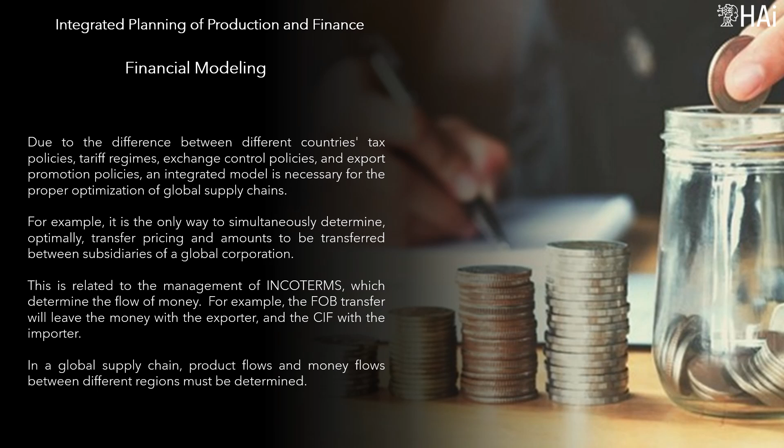Due to the difference between different countries' tax policies, tariff regimes, exchange control policies, and export promotion policies, an integrated model is necessary for the proper optimization of global supply chains. For example, it is the only way to simultaneously determine, optimally, transfer pricing and amounts to be transferred between subsidiaries of a global corporation. This is related to the management of Incoterms, which determine the flow of money. For example, the FOB transfer will leave the money with the exporter, and the CIF with the importer. In a global supply chain, product flows and money flows between different regions must be determined.

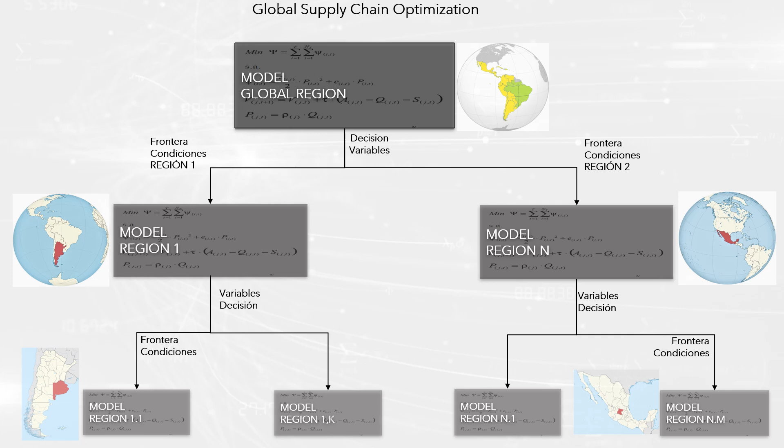It should be noted, however, that the goal of the parent company is not to maximize profits in the countries, but the profits of the corporation, and presumably, to place the money where it is most convenient. Holistic planning should consider after-tax earnings, including taxes on bank money flows. This involves considering, among several, tariff regimes, Incoterms, exchange control policies, export promotion policies, free trade agreements, labor law, currency risks, and the political risks of each country.

The case concerns the hypothetical company Beer Express, which operates in 5 LATAM countries, 6 industrial plants, 15 distribution centers, 15 consumption zones, 25 packaging lines, and 28 end products. The case uses realistic data, coming from real cases, adjusted with financial data. The goal is to use an integrated production finance model to determine optimal transfer pricing, defined as those that maximize corporate profit after taxes.